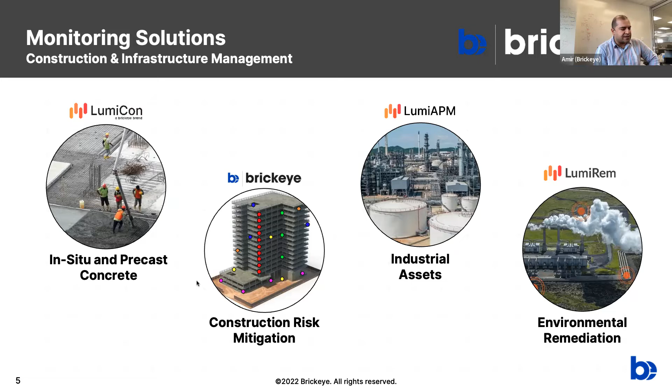One of the flagship products that we have for construction is our concrete sensor. But as I said, we are not limited to the concrete sensor. We have a wide range of different types of solutions to help with risk mitigation, enhancing productivity, and enhancing safety at the construction job sites. And we are also doing projects in the oil and gas sector, and also for environmental subsurface monitoring.

So what is the mission here? What is it that we are trying to achieve? One of the issues that we have identified at the construction job sites is a lack of proper automated tools to help with managing the quality, managing the schedule, and mitigating the risk.

You know that we have these BAS, building automation systems, right now in place. They have been around for a while. The main providers, very familiar names such as Siemens, Honeywell, are very much involved in offering these building automation systems. A smaller scale of it is like the smart home applications that we have. What we are trying to do is to mimic that concept and bring that idea into the construction job sites.

Right now, we know that this industry is severely suffering from lack of innovation, lack of adoption of technology. The margins are very, very thin. And the issue is that more than 80% of the projects go over schedule, and that always adds to the cost.

So for those reasons, we have realized that there are different types of IoT systems that can be added to the construction job site, which can help with not just maintaining the schedule, but also being able to advance the schedule, and help with lowering the risk, lowering the cost, saving time, and also mitigating the risk. I'm going to talk about those risks a bit later today.

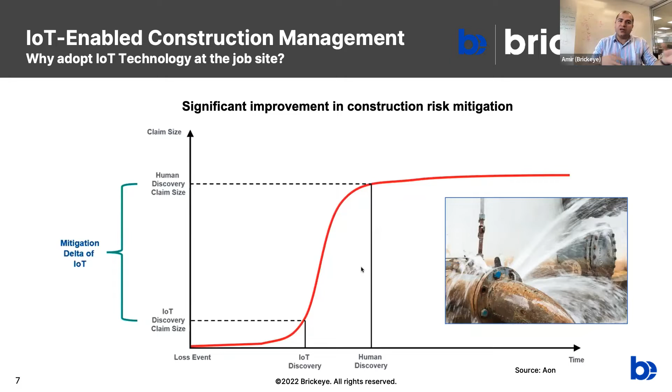Think about that. This solution was not there in place, and in two days you had this stream of water from the pipes, and then the size of the damage it could have caused at the job site.

So these IoT solutions are known to help with not just productivity and quality, but health and safety, having systems for the detection of dangerous gases, temperature, humidity, and solutions that can help with health and safety and also with environmental sustainability. These are solutions that can help at the project level.

At the project level, it can help the general contractors, the project owners. So there are so many parties that can benefit from this solution.

This type of risk mitigation solution, or IoT solution, can be offered to the industry at the estimation stage, where you would be able to offer it to the developer or the project owner, showing that these solutions can help with risk mitigation.

You can also come up with a risk mitigation plan when you are trying to get a premium from the insurance companies. And this is the conversation happening in the industry today, that insurance companies are forcing general contractors and developers to deploy these types of IoT solutions, because first of all, it reduces their risk as well.

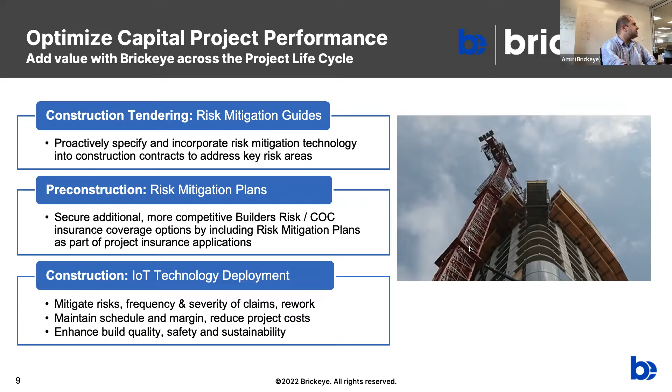And on top of that, what's going to happen is that they can also offer better premiums. They would be able to offer more competitive pricing. Eventually, this is a technology that can be deployed at different stages of the construction.

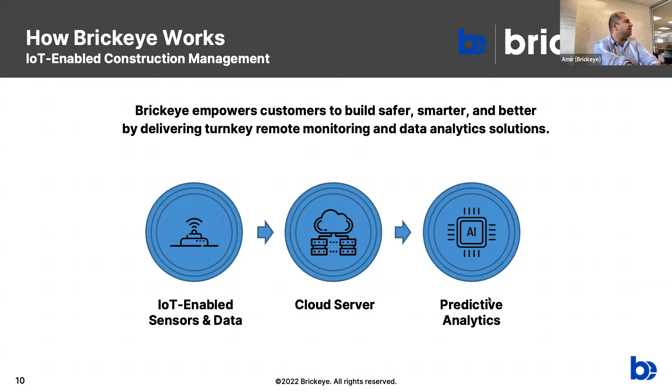So this IoT solution should be a turnkey solution that should include hardware, should be able to provide connectivity, and also the predictive analytics. This solution would also cover different levels of access to the data, from the dashboard to the mobile phone application with summary reports.

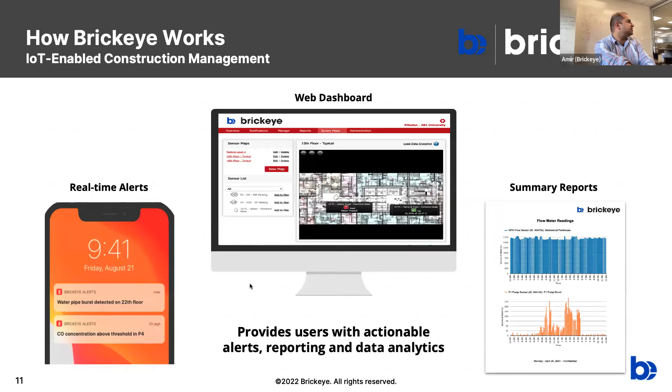You can have your floor plans, you can tag where the sensors are on the floor plans, and you can set up all different sorts of notifications for the sensors that you have.

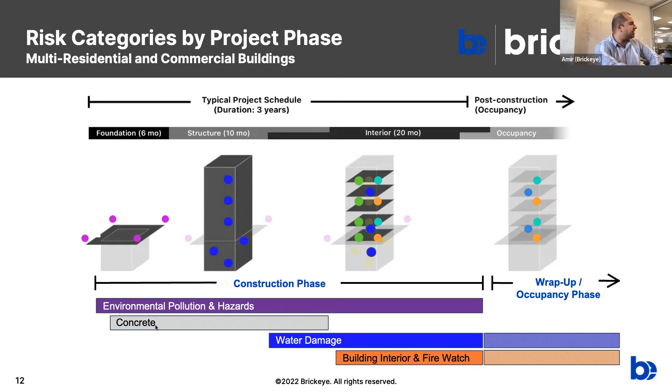I'm going to talk about the different types of sensors, but it's quite interesting that there is a wide span of different types of solutions that can be used from the excavation stage up until the project is finished and we move on to the occupancy phase, including environmental pollution hazard type risks that the IoT solution can address: concrete sensors, water damage, and then building interior and fire watch.

So let's talk about the risk. What type of different risks are there that we can see at the construction project site?

One of the very well-known ones is noise. You know that there are certain bylaws and regulations, particularly in urban areas, that you have to comply with regarding noise levels. And the issue is that with noise, you can have challenges, you can have complaints from the community around the noise generation at the construction job site.

Even if you go to downtown Toronto, you see the amount of noise generated from these sites, and all the communities are complaining about this. This can end up with a kind of legal dispute, and that can potentially lead to two or three weeks of shutdown at the construction job site.

Think about the cost of having a construction job site shut down for, like, three weeks or two weeks. So basically with noise, you can deal with delayed starts, bylaw fines, and community complaints from adjacent residents.

And also vibration. Vibration is another risk. When you start the excavation, when you start the building, you can be dealing with damage to the adjacent properties if you do not monitor vibration properly. And also dust—dust is another risk at the construction job site.

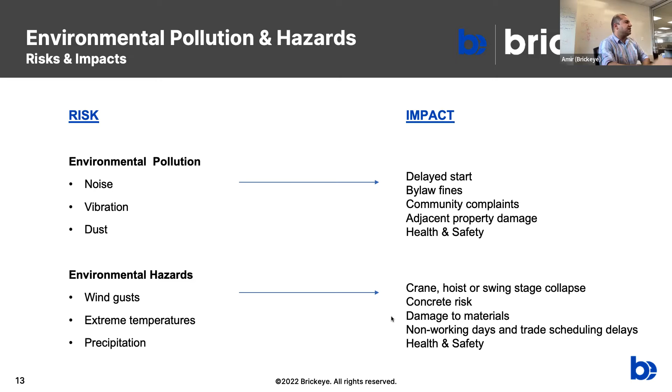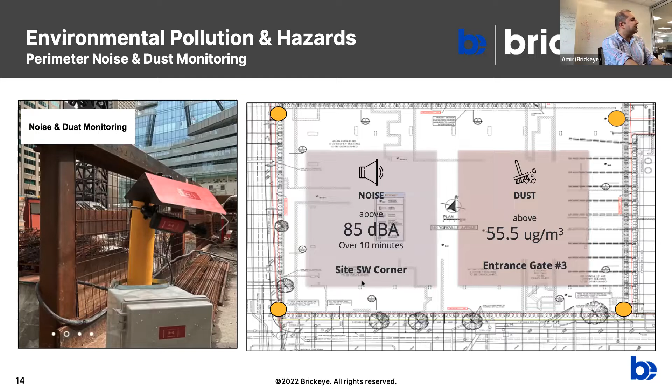So let's start with noise and dust. A noise and dust sensor becomes very valuable when you deploy them at the excavation stage. Typically you want to have a couple of noise sensors, usually specified by the engineering firms, placed at the perimeter of the building, along with dust sensors. Based on the regulations and bylaws you have, you can set thresholds so you always get notified when you are breaching the threshold for noise and dust, in real time and remotely.

The value here is that by having a noise and dust monitoring system, you also have the option of getting early work permits. There are conversations going on with the cities that if a noise sensor is installed, construction companies can get an early work permit and maybe save a couple of hours per day. So instead of starting at 7 a.m., maybe they can start at 5:30 or 6 a.m. Over the course of a 4-year or 5-year project, that can end up saving millions of dollars, in addition to providing evidence and proof when there is a complaint from the community.

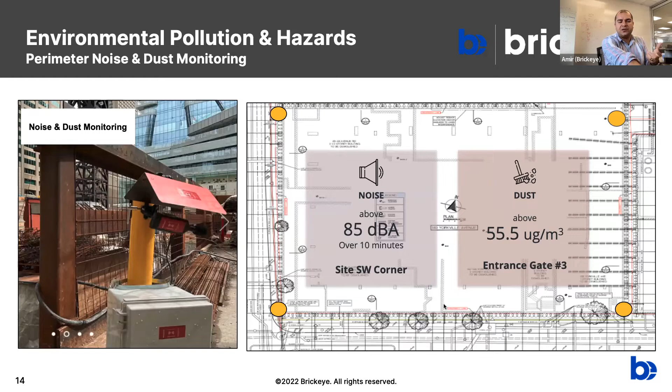The other solution that we have, which is also very interesting, is to make the fences smart. One of the challenges in the industry right now is the collapse of fences, fences being stolen, or intrusion through the fence into the construction job site. So now think about a smart fence where you install a wireless IoT vibration sensor that can detect any sort of intrusion through the fence for security purposes.

Now you may have fences at the construction job site and you want to make sure there are echo barriers there, and then you use a noise sensor to confirm you're complying with the requirements for those echo barriers. You can also have air quality sensors and dust monitoring, installed separately one by one on the fences, adding lots of value.

On top of it, fences are coming from rental companies such as Battlefield, Cooper, and United Rental. One of the issues I mentioned is theft of the fence. Now you can also put a GPS tracker on the fences, so when they are stolen from the job site during off work hours, you always have the option of tracking them. This is becoming a very interesting topic with rental companies that can benefit from this solution.

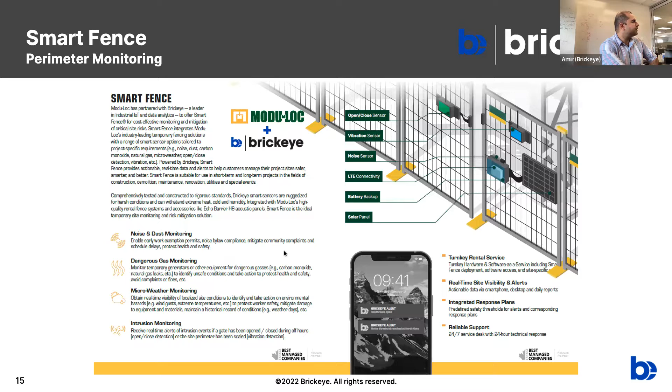The other one is the weather station. By installing a weather station, you would be able to monitor a historical record of weather days, the number of days you had to shut down the site because of abnormal or extreme weather conditions. On top of that, it helps with planning and scheduling of your trades, and you can avoid the collapse of cranes or hoist stages.

Based on the local weather conditions, every day you can make a decision on what type of design mix should be delivered to the job site. Specifically in Canada, and in Toronto in particular, every day we have different weather conditions. Locally, every morning the superintendent can come to the site and make a decision based on the current temperature and prediction, and this is accurate because it's local. So I can have a conversation with my ready mix supplier about the design mix I need for today. This becomes more and more important in winter, to make the right decision for the selection of the design mix delivered to the job site.

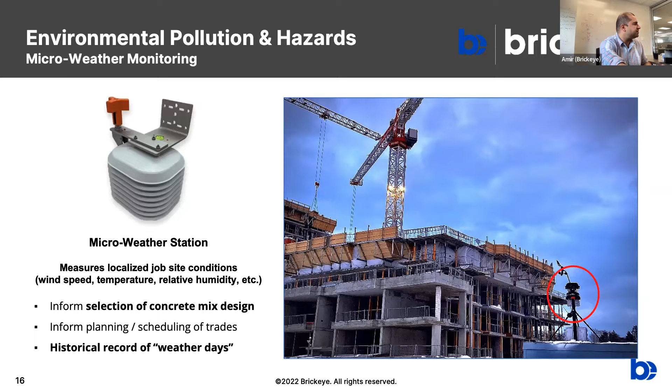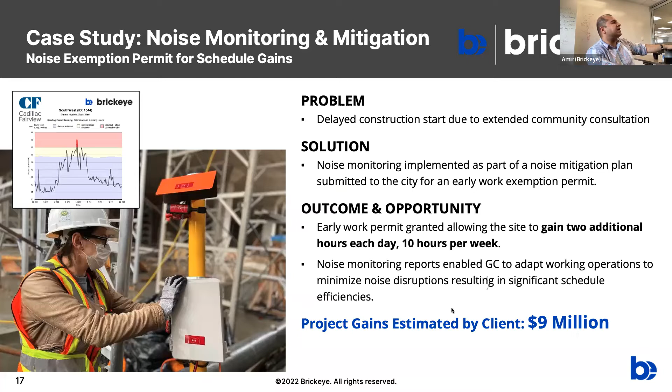So this is a case study that I have for 160 Front Street, which is owned by Cadillac Fairview, and PCL is working on it. The problem was about how they would be able to advance the schedule on this project or to avoid the delay. So with the installation of our noise sensor, they were able to get early work permits, and they were able to gain two additional hours each day, equivalent to 10 hours per week. That would result in about $9 million of savings by being able to advance the schedule using a noise sensor, because they were able to get the early work permits.

The other famous IoT solution that is becoming very popular in the industry is the concrete sensor. Last time when I did a presentation, I think it was 3 or 4 years ago, I talked about the concrete sensor, but there are two main reasons you want to use a concrete sensor in the industry today.

The first and foremost reason is for infrastructure projects, projects dealing with bridge decks, locks, and concrete dams. In those cases, you are dealing with mass concrete placements, and for mass concrete, you should have a thermal control plan. The question is, what is the definition of mass concrete? There is no clear definition. The ACI committee basically suggests any concrete deeper than 3 feet, and in some states, 4 feet, depending on the amount of cementitious material and the rate of heat generated.

During the exothermic reactions, you want to monitor temperature at the core, at the surface, and at the corner. First, to make sure you never exceed 159 or 160 degrees Fahrenheit, and also to make sure you're within the right threshold for temperature differential, because if the temperature differential between the core and surface goes beyond 35 degrees Fahrenheit, that could also cause cracking.

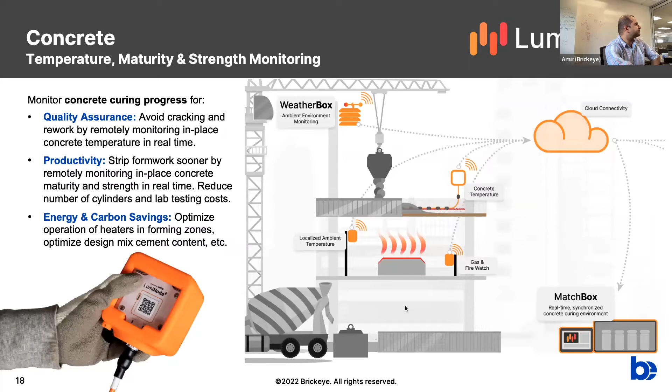Going back to the thermal control plan, for piling projects there is a requirement. Think about a cage that is 50 feet or 100 feet high, and when you're putting it into the ground and pouring concrete, there's an ASTM standard that requires you to monitor temperature every 50 centimeters to check for potential bulging or cracking based on the temperature differential.

Now think about an armored ruggedized cable like this that can be as long as 10,000 feet, so 100 feet is very easy. Using a digital sensor in a distributed fashion along a single line of cable, we can have up to 30 sensors. So with one line of cable, you can do an entire temperature profile of your pile.

The beauty of the system is that you don't have to run multiple wires for monitoring at different locations.

This solution is very unique from that standpoint. I have a client called Viking Construction in California. They are doing UHPC, and I believe they're planning to do the pour next week. We did the calibration for that concrete, and it reaches 12,000 PSI in less than 10 hours. Unbelievable, 12,000 PSI in less than 10 hours.

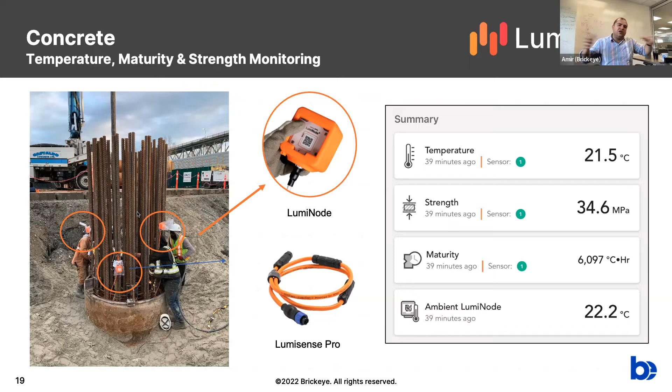They have a mandate from Caltrans to monitor the bridge, and they're using that UHPC for a bridge deck, so they have to do an entire temperature profile of the deck. We are building 500-foot long cables with 30 sensors at 15-foot spacing to put in the bridge decks for temperature profiling.

These are all the values of having IoT solutions - you can enable the use of better material, more advanced materials, in your projects.

These are some case studies. I have lots of case studies here, but some of them show that, on average, we are able to save 2 or 3 days per pour.

Let's talk about the ROI on the concrete sensors. Take a high-rise project - what is the number of pours for a 30-story building? If you do 2 or 3 pours per floor, you're talking about on average 100 pours. If you're able to save 2 days per pour, that's equivalent to 200 days of savings.

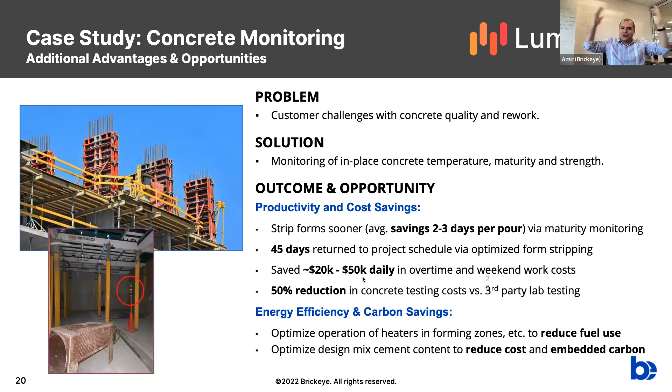What is the cost of construction delay in North America on average? On average it's about $10,000, somewhere between 5 to 20K. So 200 times 10K means about $2 million in savings. What is the cost of this product if you want to use it for that project? Less than 20K. So you invest 20K, and the ROI you get is just crazy - 20K versus $2 million in savings.

Water is also a huge topic these days in the industry. The risk is unattended water flow, which usually happens during off-work hours or weekends. That happens a lot - I don't know why, but usually these things happen during off-work hours. The water leaks and infiltration impact insurance claim frequency and severity.

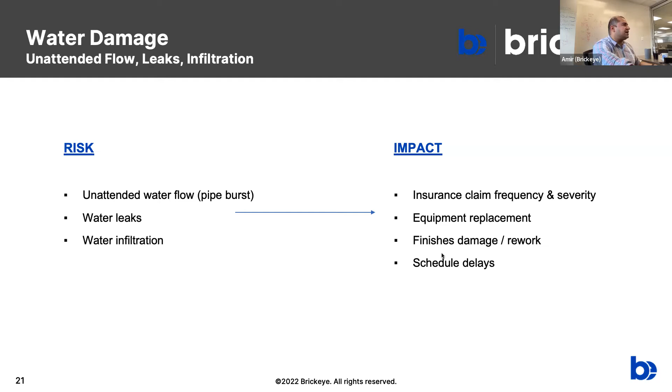Think about that $250,000 deductible you have on your water claims, which is crazy high. They have to do equipment replacement, damage to the finishes, and it can cause schedule delays and so on.

These solutions are also very important in electrical risers, mechanical rooms, and electrical rooms. Think about combining this with an automatic shut-off valve. Whenever a leak is detected, you can schedule it so that during working hours you just detect the leak but don't shut it off, but during off-work hours, when a leak is detected, you also shut off the pipe. That helps with prevention of risk and incidents.

One example is elevator shafts. It's usually taken for granted, but if there's a leak in the elevator shaft and it hits the electronics, you have to shut down the site for a minimum of 48 to 72 hours to fix it, recertify it, and make sure it's safe to continue using the elevators.

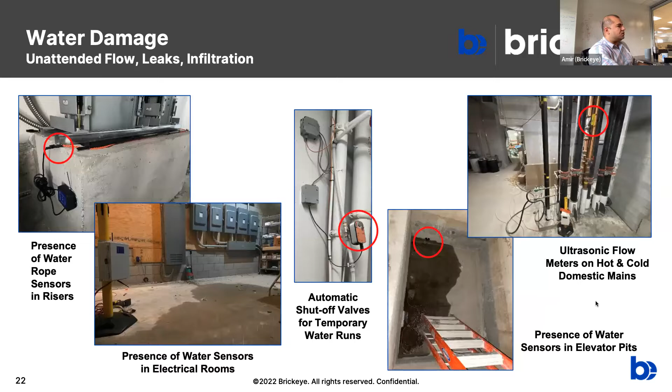Or even the hoist - the hoist management is by itself a big topic in the construction industry. There are also solutions for the hot and cold mains. I have one example from a project by Bird, where there was an unattended water leak during off-work hours.

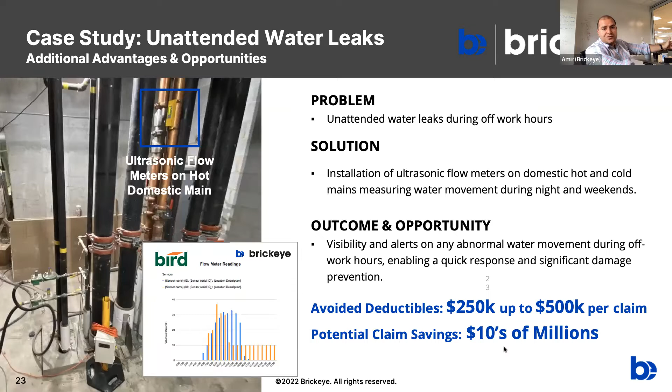We had ultrasonic flow meters on the domestic hot and cold mains measuring water movement during night and weekends. This allowed us to understand abnormal water movement during off-work hours and enable a quick response. The automatic shut-off valve was activated, and we avoided a deductible of $250,000 to $500,000, with a potential claim saving of tens of millions of dollars. These are all the numbers from that project.

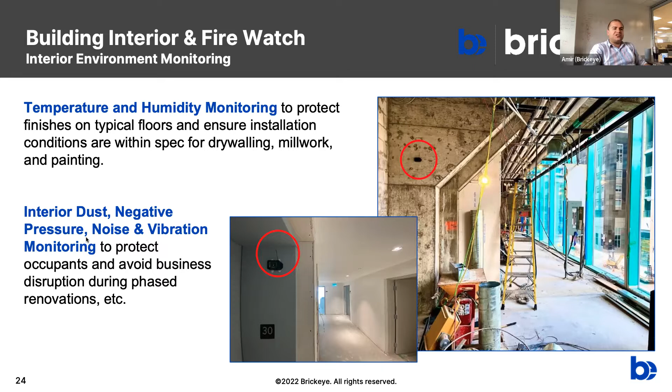Also for the building interior and fire watch, usually when you're doing the finishes, you want to monitor temperature and humidity in case there is a leak, and to make sure there is no damage inside the building. You also want interior dust, negative pressure, noise and vibration monitoring to protect occupants if they are there during the finishing work, and to avoid business disruption. There are always complaints about dust, air quality, and sometimes abnormal vibrations during finish work, so these IoT solutions help you monitor all of that.

And eventually the gas sensors—the dangerous gas sensors such as CO, H2S, smoke, fire watch—these are all very, very important parameters to monitor during construction.

Just at Block 11, to bring up an example, a couple of months ago our system sent a huge notification that there had been a breach of the threshold for CO level at the parking level, and everyone got notified quickly, because the problem with carbon monoxide is that it doesn't have any smell, so you would never know there is CO in the area. We detected it right away, and one of the safety officers from Pomerleau also went to the site, and they evacuated the entire site. They realized the root cause was a piece of equipment, and they were able to remove it. So it saved lives. Just compare how much you're paying for these IoT solutions today to the value of saving the lives of people working at those construction job sites.

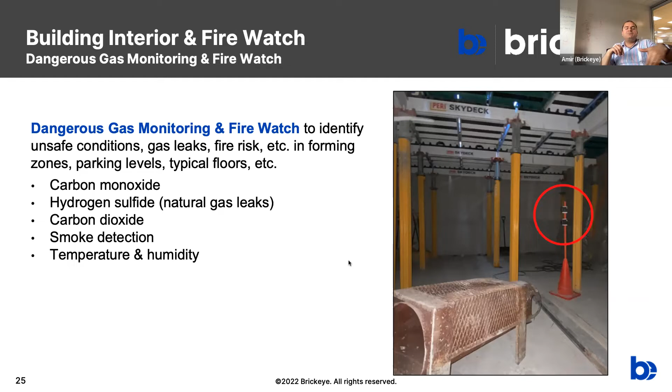Remember when I was talking about those space heaters—we can also instrument a controller system that acts based on the concrete temperature or the temperature of the forming zone. We can instrument it with multiple sensors and have a hierarchy among them, which means we always give priority to CO. If an abnormal CO level is detected, no matter what, we shut off the space heaters. But if CO is always in a safe condition, then we move to the next parameter, which is temperature. Based on the algorithm we define, we can send commands to the space heaters to turn off, bring it back on, or adjust the temperature on the heater.

So here is the summary of basically all the items and the risk categories: environmental pollution risk, environmental hazard risk, water damage, concrete risk, and building interior and fire risk.

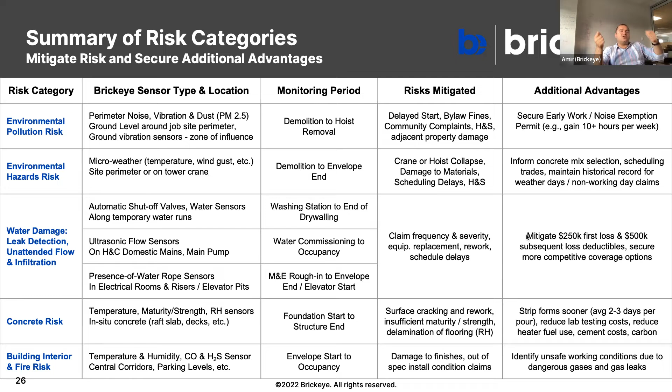Now think about marrying this with other solutions, such as a material tracking system, using GPS trackers on your devices and equipment to make sure they are not being stolen. We can have a GPS tracker and define a geofence on the software, so that whenever a device is moved out of a certain area, you get an alert and are notified if the device or equipment is removed from the site, or there's a chance of theft.

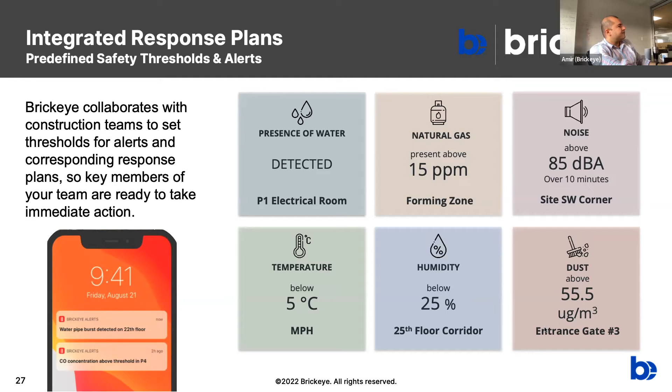The list continues. The way we work with our clients is we try to have this conversation at earlier stages with them on the thresholds they want to have, the items they want to monitor, how they should work, and what level of notification they want—push notification, text notification, or email notification. We set up everything separately for them to have the full package, which comes with a mobile application and an online dashboard.

The way we get these IoT solutions to work is also very much involved with consultation. Basically what we do in our company today is get the floor plans, and based on those floor plans, we come up with a proposal. We say that based on these floor plans, these are the areas where you want a water leak sensor, this is the area where you want dust, noise, gas sensor, and concrete sensor.

So you can have a full package of what type of solutions you can use, how they can add value to my project, how they can lead to cost saving, risk mitigation, and help with productivity. So either as a general contractor, a developer, or an insurance company, we can benefit from all these solutions, and the value you get from them and the ROI is huge.

The return on investment of using these technologies is really high. Again, to be honest, these type of solutions are very common in other industries, like oil and gas, and the utility market. I'm very happy that construction is picking up, but I'm surprised to see how much construction is still suffering from lack of adoption of these technologies, which is common in other industries today.